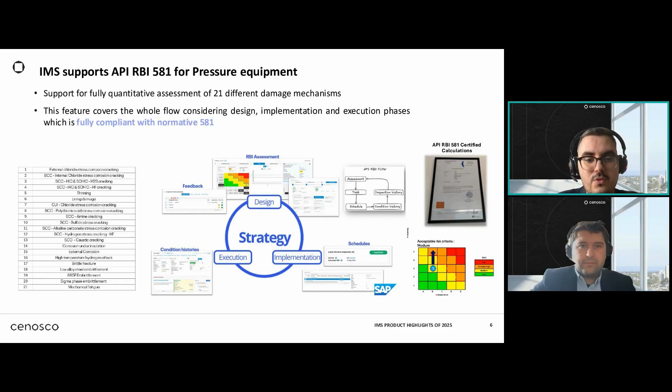We have the full quantitative assessment for 21 different damage mechanisms, which means you can have a little bit less guesswork and a little bit more precision. With this approach, you can prioritize assets based on real data and not fixed schedules, which will in turn result in better resource allocation, reduced costs, and enhanced safety, as this is one of the core themes we always focus on. Staying aligned with the latest API requirements is now effortless, and IMS handles the complexity while you get transparent risk calculations.

The second one is the SIS report generation, which will save you time for generating SIS reports for SRS, SIF, LOPA, or even HAZOP. You can generate the latest or last final approved version of your report, which will guide you into getting more traceability, or if you need it for audit log or for any type of compliance, you can have the latest report available to you, generated with just a simple click of a button. These reports are now cleaner and faster to generate for easier audit purposes, which will in turn improve your efficiency while working within it.

And the last one, which falls into this theme, are the TMIN calculators, for calculating the minimum wall thickness. Why does this matter? Because it's the backbone of equipment integrity, and the accurate calculation will ensure your assets withstand pressure, corrosion, and operational stress without over design or unnecessary costs. You can use this within the settings page, on different CMLs. We'll have a demo which will show you what this is all about.

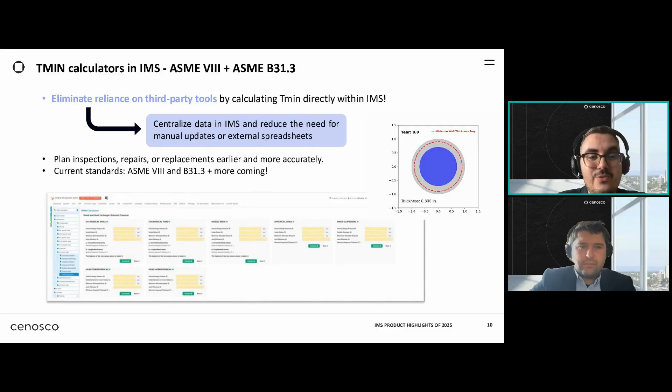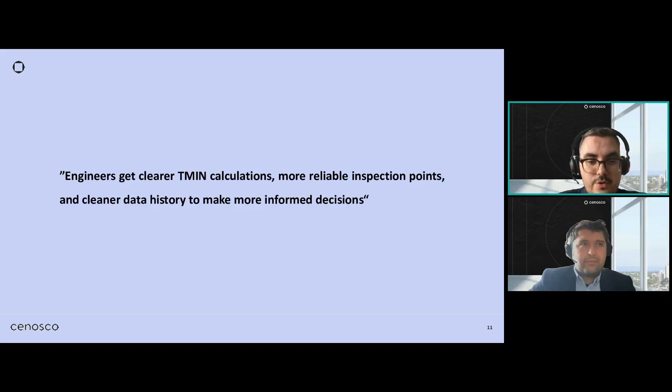So we'll have a first view of everything that you can do with this, without me just reading or explaining. You can plan inspections, repairs, and replacements. Engineers can get clearer TMIN calculations, more reliable inspection points, and cleaner data history to make more informed decisions. So these were the three topics for this pillar, and we can now go to the demo section.

Okay, so TMIN demo time. Let's jump right into that. I will showcase the TMIN calculators, where you can find them in settings, and also how you can use them in your daily workflows.

In the settings page on the top of your IMS, you will get an overview of everything we currently have for TMIN. If you go to maintenance, then corrosion data and TMIN calculators, you will get a list of all available calculators with visualization for vessels, heat exchangers, for internal pressure, and also for piping, also internal pressure as well.

These calculators are used to be kind of tested and tried out on the fly, so users can calculate, plan, and manipulate the data to accommodate within their workflows.

Each calculator also has a tooltip on top with this small info icon, and if you click on that, you will get the standard from which the calculation is taken, so ASME VIII, and also different formulas for which the calculation is being taken. For example, here we are calculating two different values as output, the circumferential stress and also longitudinal stress.

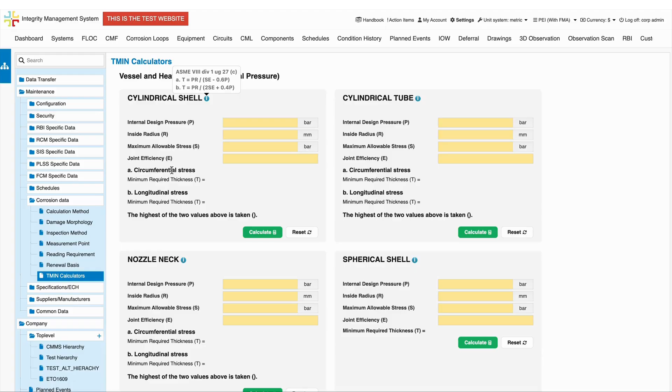But for example, if I'm working with a spherical shell and I click on the tooltip icon, I will get only one formula for minimum required thickness.

These calculators also need to be mapped to specific equipment and CML types, as I already explained, so they are related to vessels, heat exchangers, and piping systems. So they need to be properly configured, which can also be done in the settings.

Certain CMLs can have more calculators applied to them, just because of the way that they function. This can be done either by the inspection admin, or somebody from Cenosco admins can also configure it for you. So this is how the page looks like.

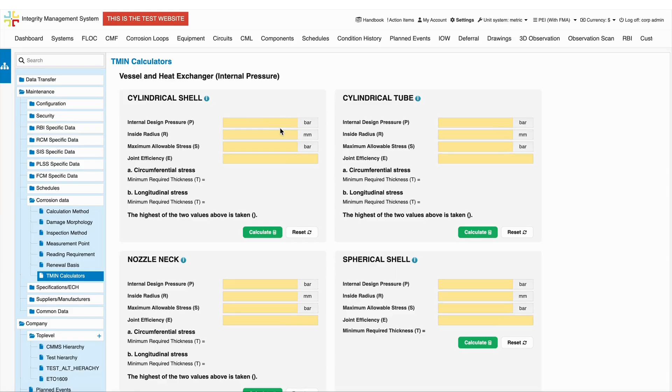And if we want to do this in practice, I can either go to my equipment page and find the CML there, go to the circuit, or go to the CML. So let me open up the CML page of IMS.

So now I'm here in the CML list. If I want to go and look at some of the CMLs, for example the first one, I will get this calculated renewal basis and renewal thickness shown here. So I can see when this was applied, or more so when the last calculation was made and who created them.

So currently it's somebody from Cenosco, which makes sense because this was a demo site, and also which calculator is being used. So if you need any type of auditing or checking who created the calculation, you can find it here inside this tooltip as well.

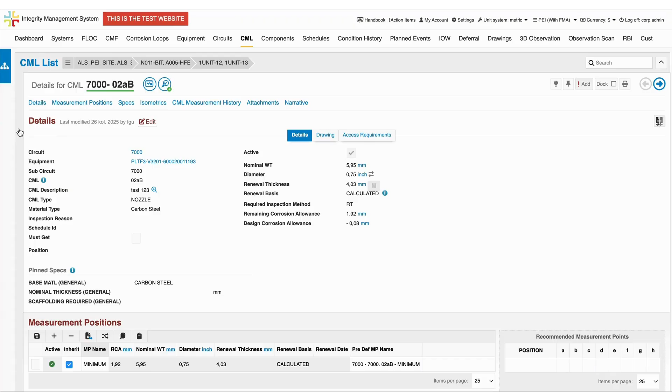But for example, if I go back and want to create a new CML which doesn't have my calculation yet, I can apply the plus button, find some of the circuits where I'm going to attach my CML, name it, okay, and select my CML type, which has been configured before.

So for example, let's say pipe. I will get this available TMIN calculator button here, and if I click on that, it will hopefully calculate the renewal thickness which I'm going to need. So I'm gonna input some of the values here.

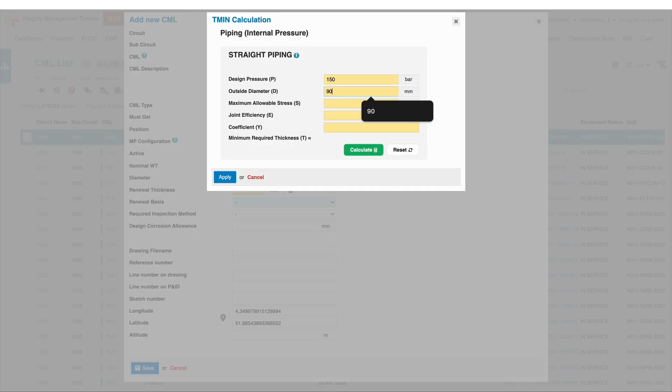Okay, let's say 90. Joint 1 and 0.5 for the coefficient. So once I'm done with inputting all of the input parameters, I want to calculate my minimum required thickness for the straight piping. And if I click calculate, I'm going to get some value which I will apply to my CML.

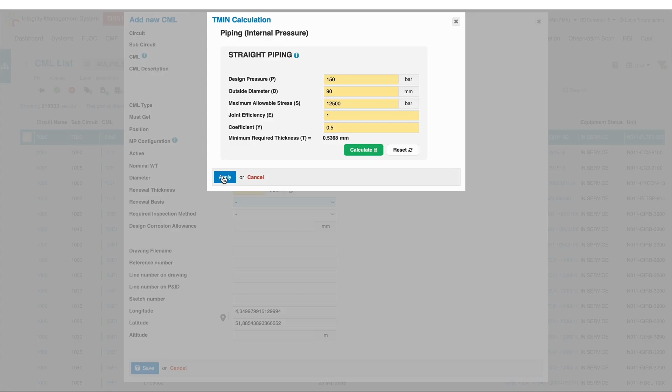Or let's say I don't want to do this here, I can click cancel. So I'm just gonna create my renewal thickness from scratch. So 0.5368, or let's say 0.67, and create my CML.

So you will see now that this page kind of opened my CML, and it looks like this. So I still have the available TMIN calculator, but the renewal basis is empty, which means this didn't come from the calculation itself. So I can also click on edit and kind of recalculate this based on my values that I had before.

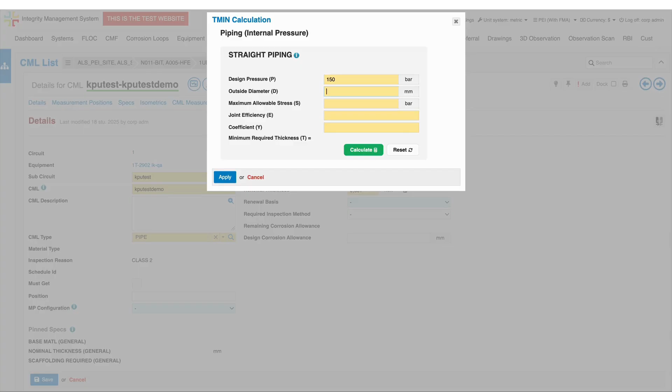So 150, 90, okay, 1 and 0.5. If I calculate it, I will get additional minimum required thickness, which I can apply because this is the correct formula that I want to use. And if I click on apply, this field changed here.

And also, if I click on this save, okay, I now know that this CML has been calculated using the TMIN calculator specifically based on a certain standard. So this, like I've said, also applies to different types of CMLs. You can see who calculated it and if it was calculated manually or using this standard, which might help you with navigating your workflows a little bit easier.

Yeah, and that's it for this demo.

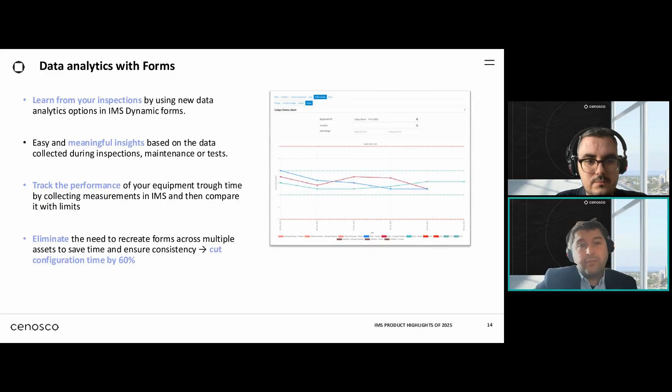Again, we're really looking forward to seeing how this is used by our customers, because we think this is a powerful way to get meaningful insights from the data. Build your dynamic form, get actionable insights really quick. This is what we want to see with our tools being used, and any feedback on this will be really appreciated in the months to come.

The next one on our list, which we think is quite powerful, is our new filters called min and max filters. It's a technical term, but they're really unlocking significant value. You can now get a list of items in seconds—something that previously required Excel, pivots, and certain changes that would take hours to get the data out. With this functionality, you get insights in seconds instead of hours.

For example, you can get the lowest remnant life for each circuit or corrosion measurement location on each unit, so you can see which circuit is driving your inspections on a certain unit. You can also get the next inspection schedule for each equipment or unit, to really know your next step on the list.

Or if you just want the most recent inspection or maintenance results, you can get that now for each equipment seamlessly in a few seconds, or for a unit if that's the case. There are plenty of use cases for these new min and max filters, but the important part is that this gives you insights in seconds instead of hours.

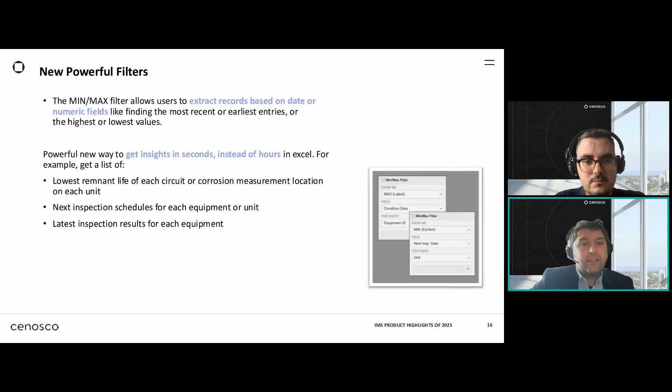So finding data now is dramatically faster, with fewer clicks, a cleaner interface, and optimized output.

But the most exciting functionality we've shipped this year is our first AI functionality. With IMS, you can now get inspection insights with Cenosco AI. We identified that endless time is needed to go through inspection reports through the years in order to examine or assess a certain equipment, for example, a tank.

If you need to do an inspection or assessment on a tank, you probably have like 50 years of inspection data, and that requires significant effort to go through all those reports. What our AI does is read all those inspection reports for you and gives you a summary so you can focus on what's relevant.

Instead of focusing on all 50 years, our AI is going to pinpoint where the most important information is stored in those inspection reports, whether that's the last several years or all 50 years. It will read all the inspection reports and give you a nice short summary so you can really screen what has been happening. Once you get that information, you can deep dive into areas where it's really meaningful and relevant to get your job done. Instead of losing time clicking and checking every year, you can just pick the ones which are really most important for your assessment.

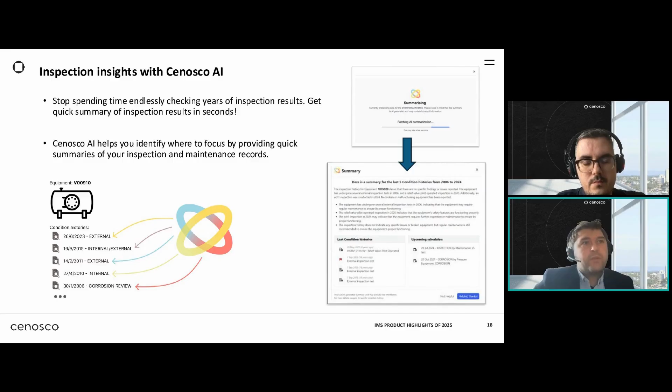So focus on the relevant and spare time by using Cenosco AI, in short, with IMS in 2025. I'm really happy to show you the demo of how this works in an actual case. Let me show you our AI in action.

All right, so here I have my list of all my assets. I want to find my tank, so let's just find it quickly. I'll click here and say, okay, give me my tanks. And I'm particularly interested in finding tank 3056. So let's find it. Okay, here it is. Let's open it up, I'll click on the name. And here I'm getting my basic information about my tank.

So I see that this tank is actually 50 years old, because the start date was in 1975, and here I have an image of it. Let's quickly see what was happening with this. So here I have this button for the Cenosco AI. When I click on it, it's summarizing all the inspections, and here I have my AI summary about this tank. Let's see what was happening here.

All right, so the tank went out of service due to the collapse of the floating roof in 2000. Okay, that's quite important information. In 2005, a verticality and settlement inspection was performed. External inspection was conducted in these four years. An internal inspection of the bottom and general maintenance was performed in 2012. Additionally, an external inspection was performed in 1995 and then in 2011.

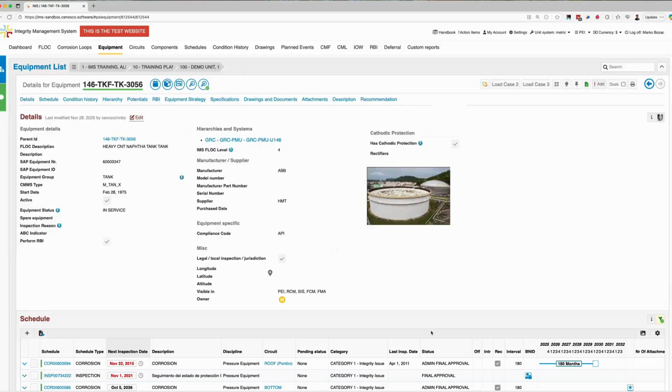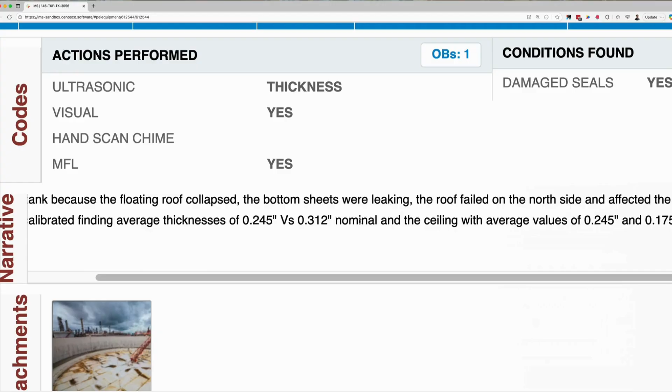So let's see, if we scroll down, we will see our inspection history. So we are interested actually in this one. In 2000, the inspection shows the floating roof collapsed. Let's see if that's the case. So here in the narrative, you see indeed this is what was happening back then - the bottom sheets were leaking, the roof failed. Okay, that's quite interesting. And here I even have an image showcasing what was happening back then.

And that's actually how you can quite quickly find out what was happening with your assets by using the Cenosco AI and the inspection summary functionality.

Going forward to the connected ecosystem, as you know, the IMS is usually not an alone island in the broader ecosystem of software that you're using. So we're really putting focus on connecting IMS with other systems. And the first one on the list is actually the FCM part, where we now have customizable flange protocols in FCM.

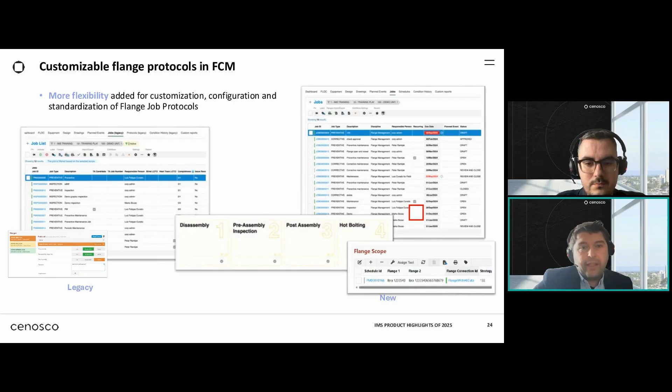Meaning that FCM previously was tailor-made only for one use case. Now this year we're shipping it customizable so that you can have different flange protocols connected with other systems you might be using, exporting data out and importing it into FCM, especially for protocols that are really specific depending on your flange criticality. With this functionality this year, you're able to customize your flange management system and asset registry tailored for your needs and for other systems you need to communicate with. So flange design logic is now smarter and syncing scenarios behave predictably, helping you maintain consistency across assets.

Carla, I want to give the floor back to you now with the delete and retirement management when it comes to SIS. Yes, thank you. And amazing demo, by the way, I'm really excited about all of these new things.

Okay, let's go back then to deletion and retirement. I really hate when the system is not that flexible, whatever tool I'm using. And I think we had some similar issues that we were trying to solve. So we've been listening to customer feedback and seeing really what's possible.

There are certain times when some objects within SIS become obsolete, which creates a necessity to indicate that these objects are no longer in use. You might delete them, which is fine, but then they're gone and you can't see them anymore. But sometimes you need them for regulatory audit or internal requirements as historical evidence, so that data may still be inside IMS. We've created a different set of rules for deletion management and retiring management in the SIS module, so you can do both depending on your asset or regulatory audit needs, giving you the flexibility to handle all of those use cases.

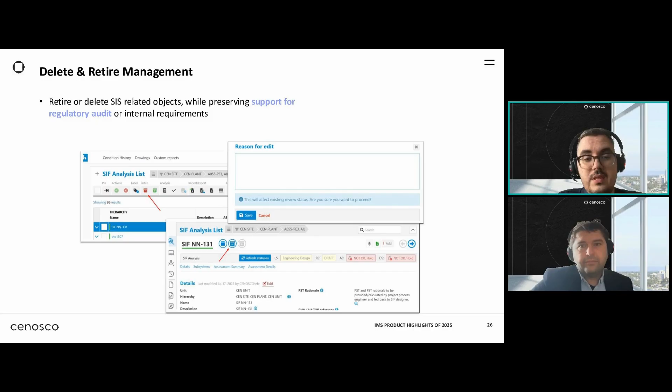This gives you the overview of what can be done. There's no more legacy clutter, dependencies remain transparent, and your data stays audit-proof with this new feature.

Going to the drawings and documents management - I'm very biased here, most of these things I worked on, so I'm really excited to show this to our customers. We did one huge change with drawings: we redesigned the whole UI in the drawings tab so you get more clarity and more visibility on the things you need the most.

If you're working with any type of drawing or document, you know how important it is to find the necessary information and connect that with your equipment, CMLs, or FLOCs. You'll have better visibility of everything you need on one screen. You can now import drawings more easily, and you won't have to stress about whether you uploaded the correct version or file - IMS does the thinking for you.

If you already have a document with the same name inside, you'll get a message saying this is already here. There's also a feature for audit and traceability with event history - still within this whole area of connected ecosystem. If you need to see what was changed or who changed things within your documents, you now have the ability to do this.

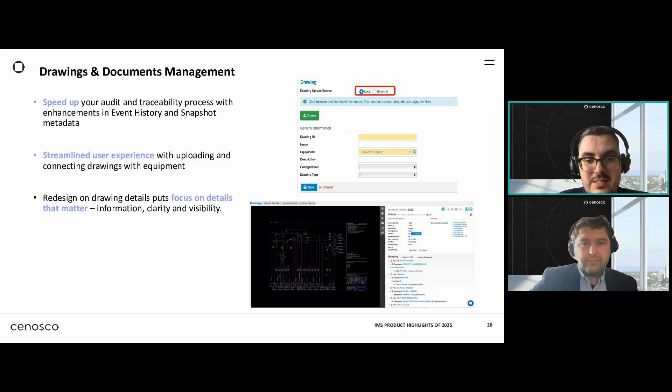We redesigned drawing sections so that even complex assets load quicker, look cleaner, and are easier to navigate and manage, which is important because you need clear visibility of what's going on. To show you and not just talk about this, we'll go into the drawings demo where I'll showcase everything we talked about, so you get a visual representation of these things as well.

You can see here, this is the drawings grid, which shows all of the drawings assigned to equipment, so you can search it. It should be pretty familiar to you, but notice this plus button in the top left corner, which is similar to what you've already seen in the FLOC, equipment, CMLs, condition history, or any other tab where you might upload objects inside of IMS.

If I click on this plus button, it opens a new pop-up which lets me import the drawing, assign it to equipment, give it a description, configuration, assign a drawing type, and I can upload from my local PC or laptop, or from an external source, which might be some document management system you have integration with, like SharePoint or Assai.

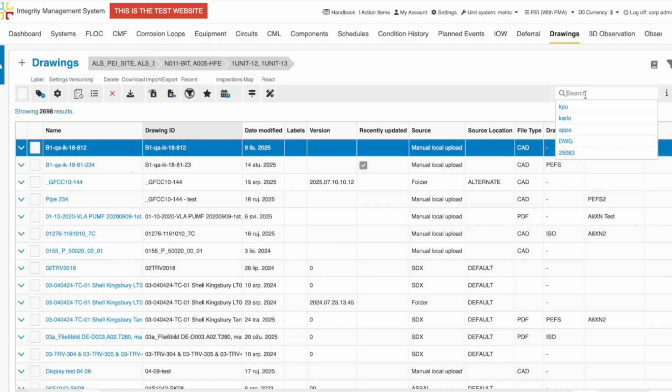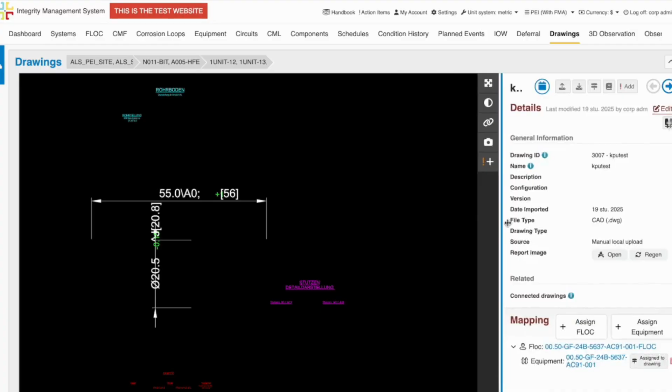Okay, the drawing is now uploaded. As I can see this green toast message in the top right corner, and if I want to search for it, let's see, it's here, this one, and you can see the redesigned drawing details page where we put the drawing a little bit more in the center of the page so you can kind of see it more clearly, or if you want to resize it, you still have the option to do that, to put focus more for the details.

The details are on the right with the same controls for the re-uploading, for the downloading of the drawing.

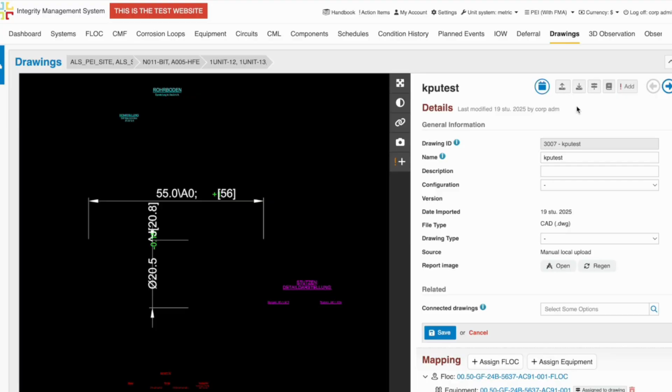Also, you can still see the connected drawings. You can edit whatever you need to do, like the name, or assign it a certain configuration. And you can see mapping on the bottom, which will show you for which FLOCs, equipments, and CMLs this drawing is connected or mapped with, so you can assign additional configuration, additional mappings, and additional equipments, or even CMLs if they exist on this drawing.

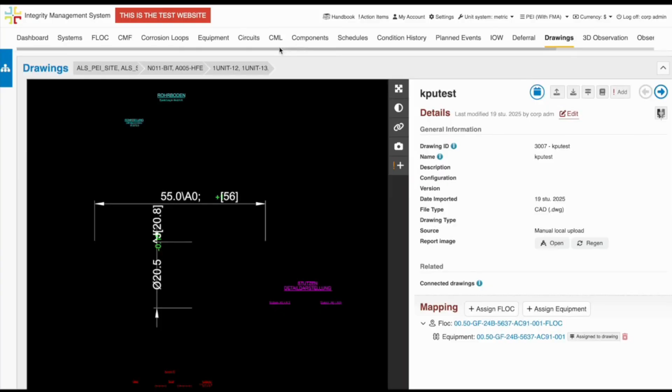For example, if I go to this equipment now, I will be prompted to the equipments page, and if I scroll just a little bit down below, I will find my drawing. It's this one called kputest. So this means that I've successfully attached my drawings with this equipment.

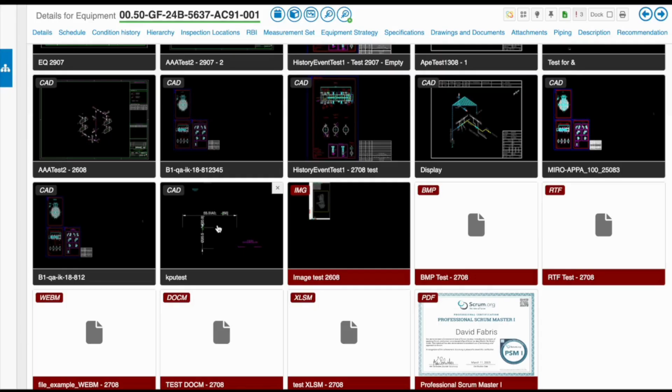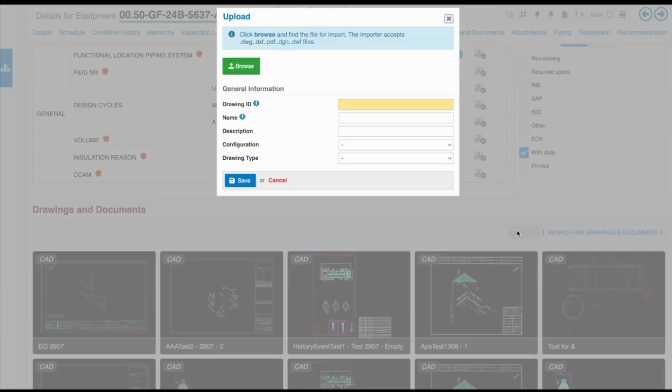If I need to upload any other document or drawing for this equipment, I can do it from this screen as well. I have the upload button, and if I click on it, I will get the same kind of pop-up window with the similar information without the external source, because the external source is still here under the search for drawings and documents. So uploading still works in this way as well.

And yeah, those are some of the things that we did on drawing, mostly UI changes for the first part, but also some additional features like uploading the drawing and also kind of having better visibility for the drawing, so it's more in the full screen or more easier to kind of see it than it was before when it was layered one below. So that's it, yeah, for the drawings demo.

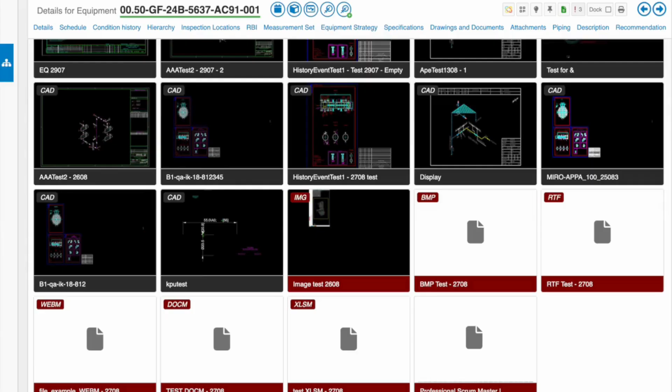So final section, innovation spotlight, which might be kind of different than what you are used to. So we did kind of say some of the things, and there might be some Easter eggs if you were listening carefully. But before we close, we want to highlight something very completely different. It's not a release that it's available for you, but it's a glimpse of where IMS is heading next. The world is changing fast, and we are building capabilities that match that pace.

So what we were kind of trying to do and what challenge we were faced with. Inspection workloads keep growing while all of the teams keep shrinking. Assets are aging, standards are tightening, and everybody is expected to detect more anomalies with better accuracy in less time. But the industry kind of hit a wall with manual review of photos, manual classification of corrosion, manual documentation. It's slow, it's usually very subjective, or you need like a certain type of expertise. And it pulls the engineers from making the decision, which are really supposed to be like a life-changing decision for your asset. So the innovation that we did is kind of two-phased approach, one with robotics and one with AI.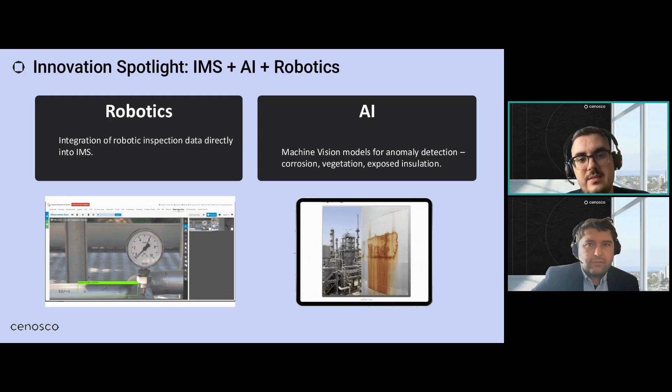So we ran two innovation tracks. For the robotic inspection data, instead of having the robots getting the data dump, manual sorting of the data, manual uploading of the data, uploading that to your workflow, we are testing a feature where robots can scan your assets, detect anomalies, which are then synced into the IMS, which again automatically creates inspection points or recommendations. So we are reducing this kind of clutter and bottleneck from engineers to kind of having a more automated workflow.

But also parallel to that, we were testing the AI anomaly detection, where we were trying to figure out if a machine learning model can actually reliably detect anomalies on smaller data sets of images to classify corrosion on piping, on bolts, on studs, maybe some different coating defects. And we built a model that delivered in the higher 80s or lower 90s precision. Is it perfect? No. Is it promising? Absolutely. So we know that this is the future, and it proves that AI can take the first pass, highlight areas of concern, and reduce time spent manually scanning hundreds of images. And it's a foundation that we can build on. So this closes the loop between field technology and integrity workflows seamlessly and automatically.

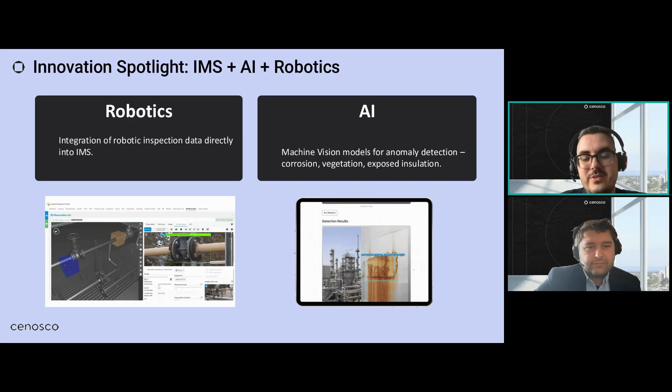You also saw where we're heading next. So the future is very exciting. Again, this is not replacing engineers, but giving them a system that does the heavy lifting so they can focus on judgment and not data wrangling. This is where IMS shows its true strength, handling deep, complex integrity logic without slowing anyone down, and doing it with connected workflows that actually save time.